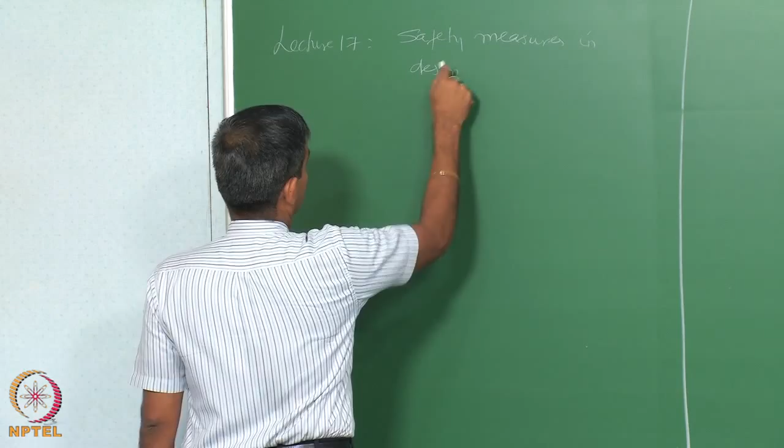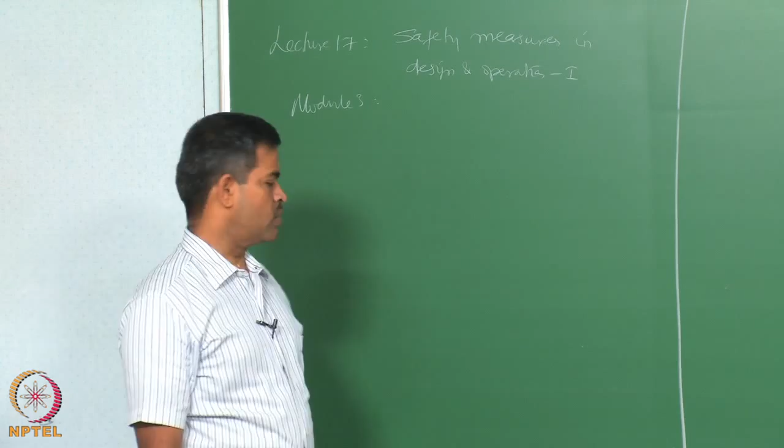This is one lecture covering module 3, where we are focusing on accident modeling, risk assessment and management. We already said that safety and risk are very important items in offshore engineering. In fact, in oil and gas production industries, risk associated with this process is very high. Therefore, though we have admissible levels of risk involved by international agencies, risk assessment and subsequently managing the risk becomes very vital, so that the economic perspective of risk is handled very carefully.

So obviously, if you want to do a very good risk management, your hazard identification, hazard analysis and management should be extremely good. People may think that if you follow safety procedures properly, the risk can be reduced. Please understand, risk is actually an outcome of undesirable events which are unexpected.

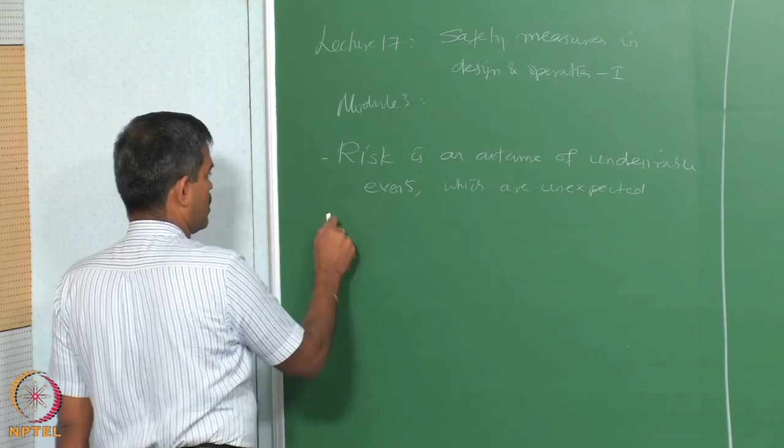They come purely accidental. Therefore, risk analysis will talk about perceiving these events in more or less a possible reality or a probable reality, and check whether, if these events become real, what would be their consequences in the overall structure of oil and gas industries in terms of economy, in terms of loss, etc.

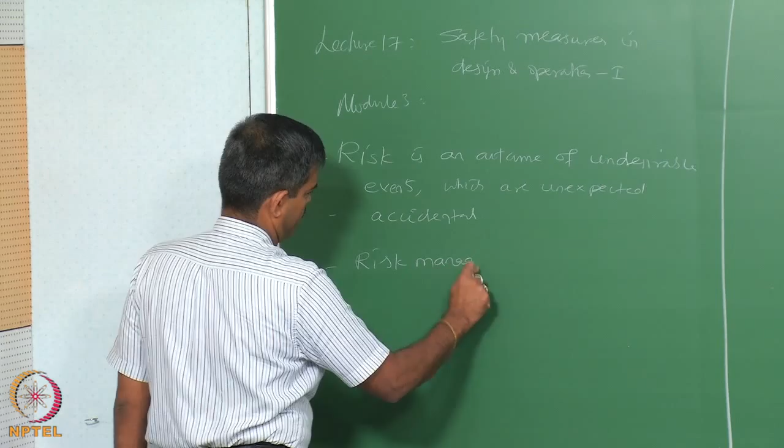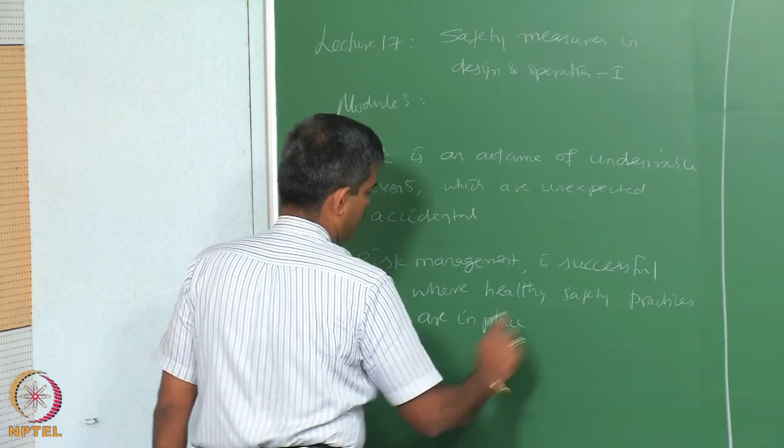When you talk about risk management, I will argue and accept your argument to some extent, saying risk management is successful where healthy safety practices are in place. So what could be those healthy safety practices, safety measures, both at the design level and at the operation level, so that we can do a better risk management, is what we will see in a couple of lectures now.

As we all understand and agree, safety measures can be done both in design stage and operational stage. Safety measures can be practiced both in design and operational stages.

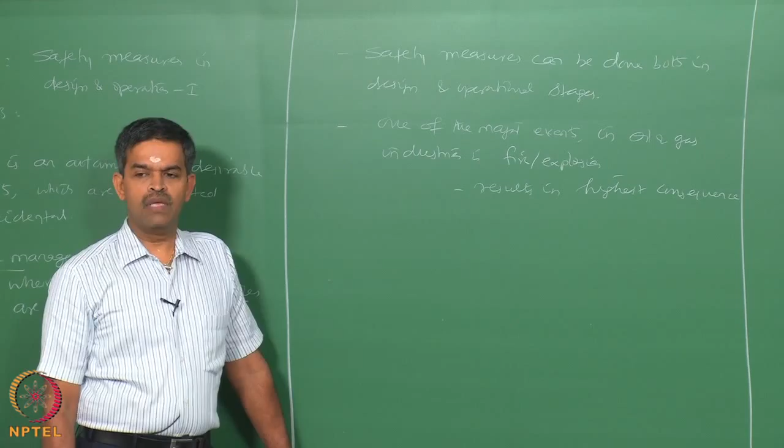One of the major events which is undesirable in oil and gas industry is fire and explosion. Because this results in the highest consequence, prevention of fire and explosion is one of the major focus.

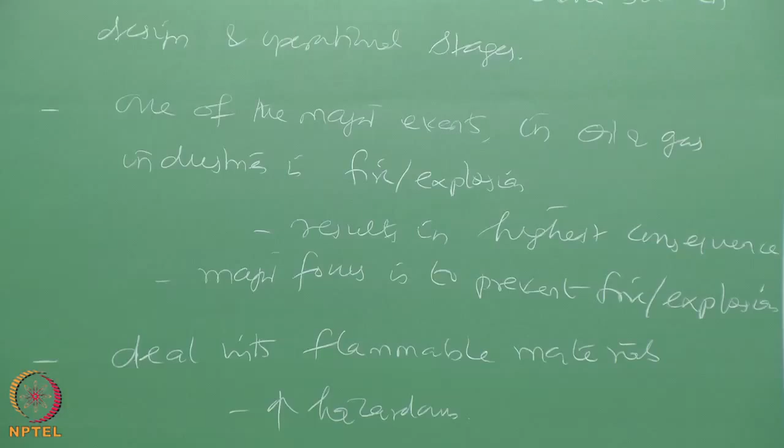We already know in oil and gas industries we deal with flammable chemicals, flammable materials, which are also highly hazardous. The flammable characteristics of the material can be altered in such a manner that it may not result in combustion or explosion, which may otherwise happen when you allow them to exit into the environment. So there are certain terms and certain practices what we will try to understand. Let us try to understand certain terminologies involved in this.

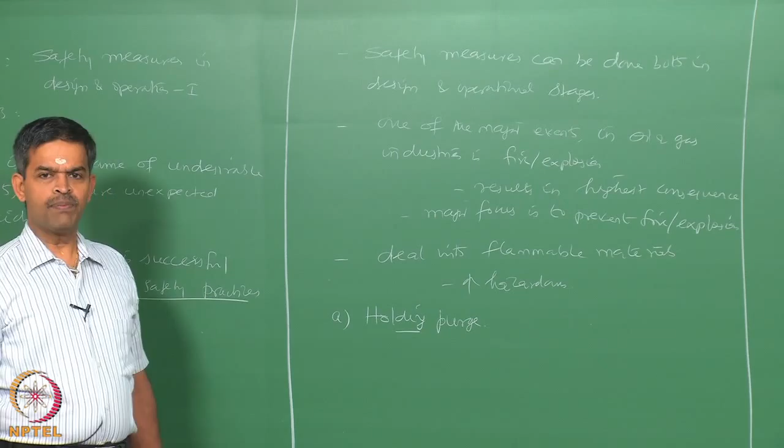Let us say, what do we understand by holding purge? It is nothing but a procedure of maintaining an inert gas or a liquid in a closed system during maintenance or repair.

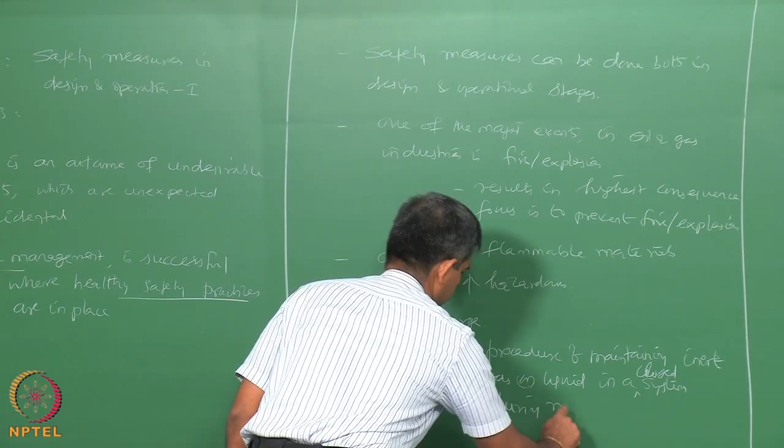So why do you do that? It is actually used to replace the normal combustible content. Something called hot cutting - cutting with the oxyacetylene torch or by other means into any pipeline or a vessel that contains combustible gas - that is what we call hot cutting.

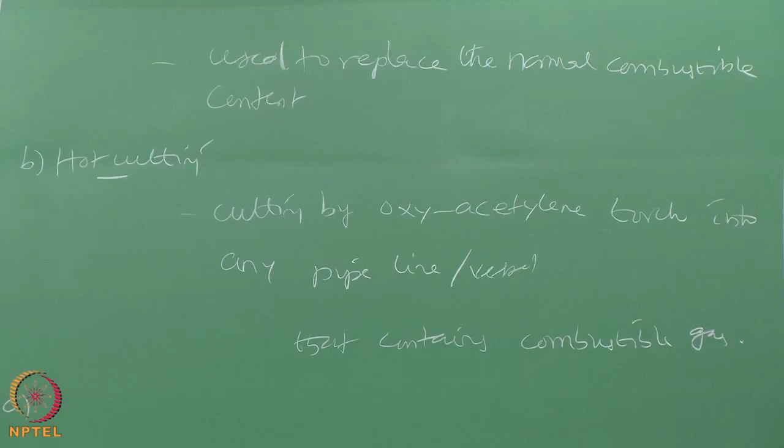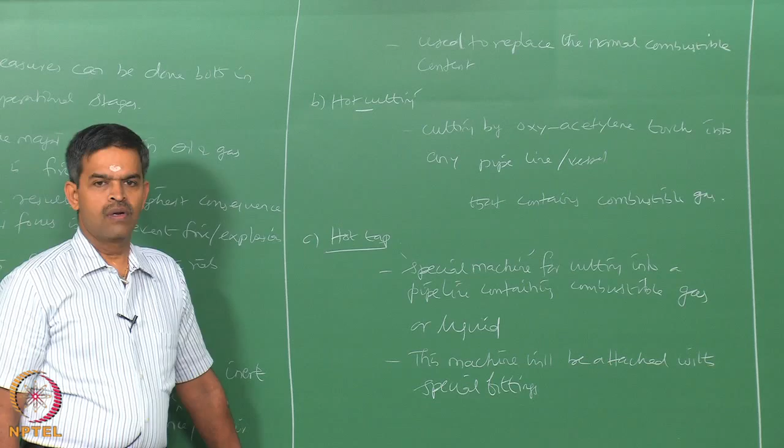Hot tap is actually a procedure of cutting into a pipeline containing a combustible gas or liquid by use of a special machine. This machine will be attached with special fittings which have been previously welded to it on the loaded pipeline. The tapping machine and fittings are constructed such that the required size of the opening may be cut in the loaded pipeline.

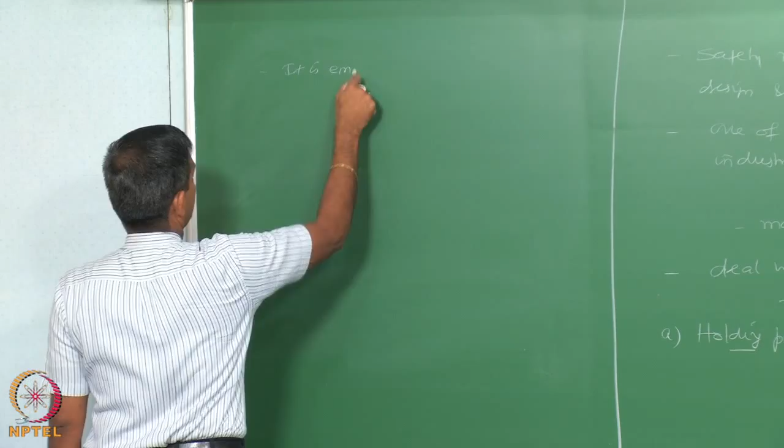So it is actually employed to cut a required size of opening in the loaded pipeline. That is why it is called hot tap. Once the operation is over, the machine can be safely removed without any appreciable loss of combustibles.

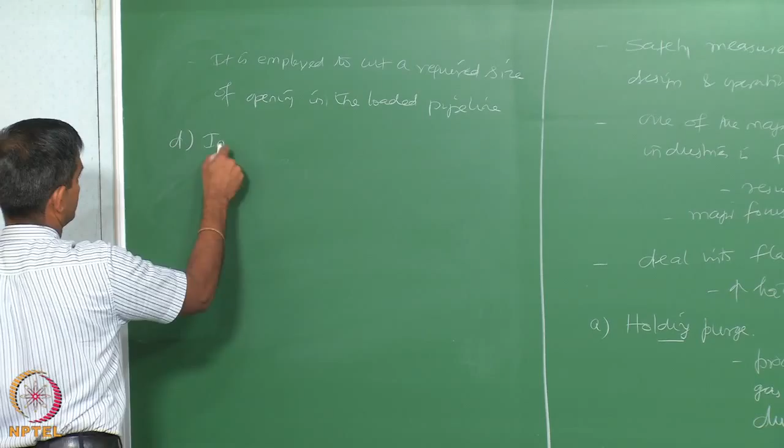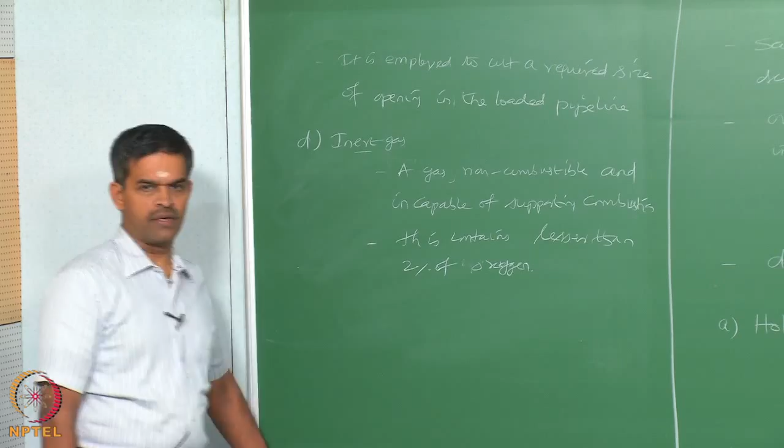Inert gas has special characteristics. It is a gas which is non-combustible and incapable of supporting combustion. How can that happen? Because this contains lesser than 2% of oxygen concentration, and the combustible constituents are lower than 50% of the explosive limit.

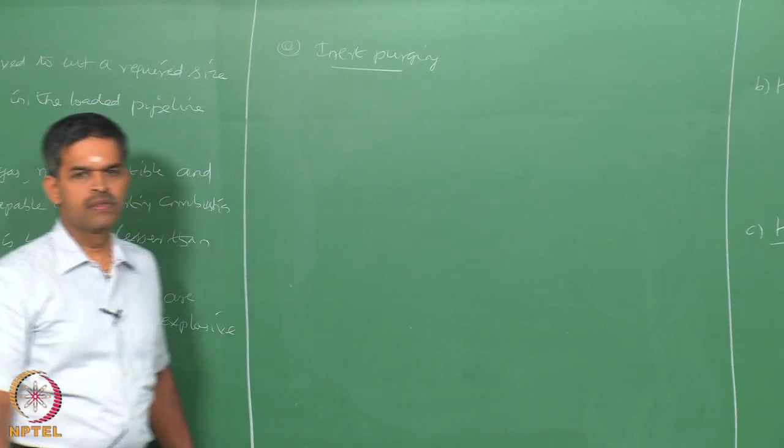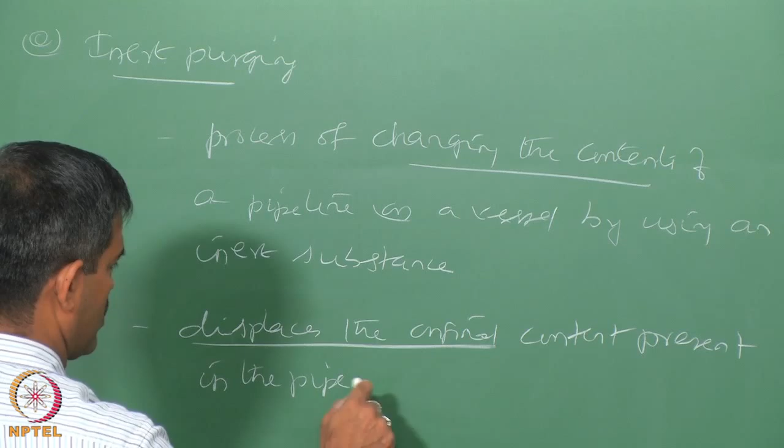Next could be inert purging. Inert purging is the act of changing the contents of a pipeline or a vessel by using an inert substance. It is actually a process of changing the contents of a pipeline or a vessel by using an inert substance. Actually, this displaces the original content present in the pipeline or the vessel. Interestingly, inert purging should not be done with flammable mixtures.

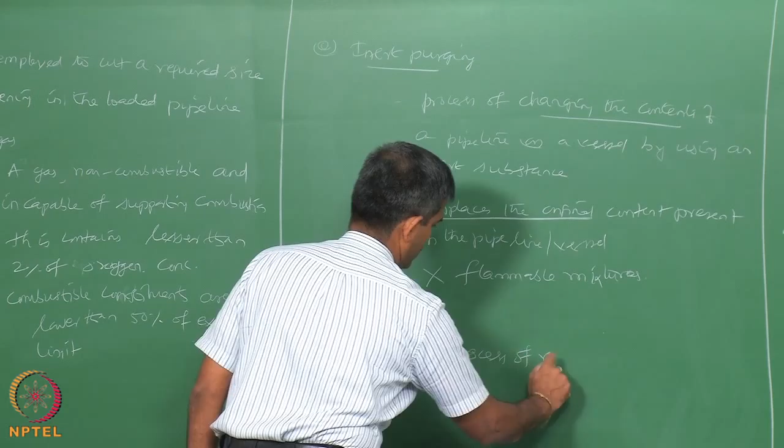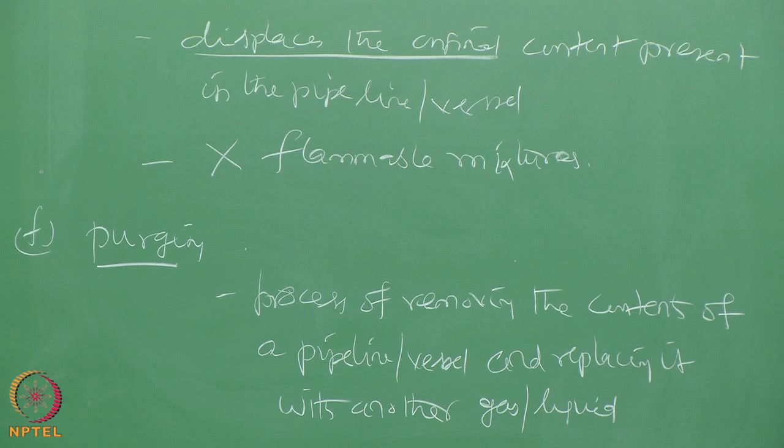Purging is a process of removing the content of a pipe or container and replacing it with another gas or liquid. It is a process of removing the contents of a pipeline or a vessel and replacing it with another gas or liquid. Purge gas - the gas which is used to displace the contents of a container - is called a purge gas.

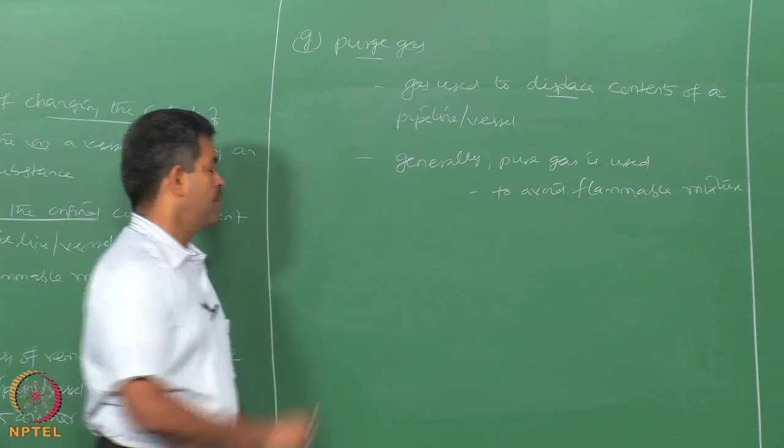Generally, pure gas is used, only to avoid any flammable mixture. Therefore, it is very important to estimate the quantity of purge gas required to displace the contents of the vessel. It enables or ensures a minimum contact with the contents and flammable mixture, so that any possible combustion can be minimized or controlled.

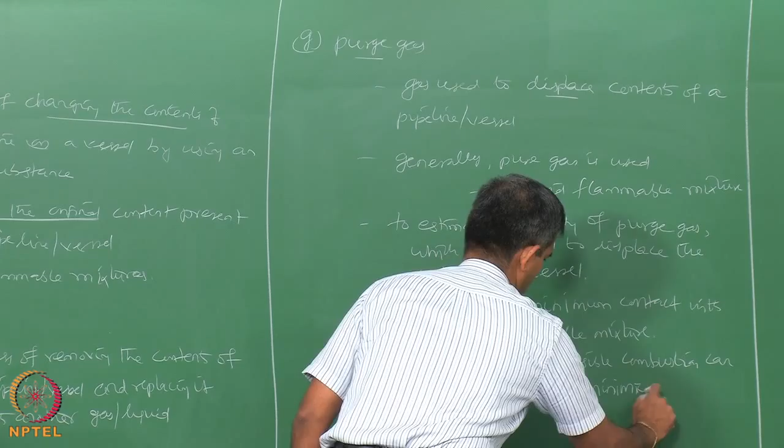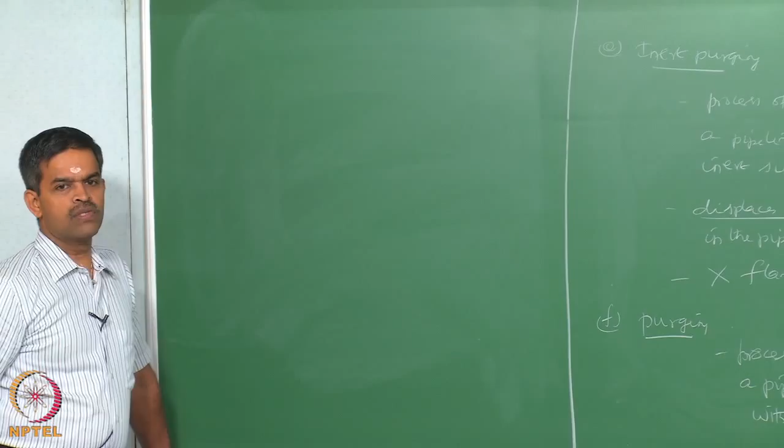We already studied in the earlier lectures about purge into service, purge out of service, and etc. Let us look at them more in detail now for understanding purposes.

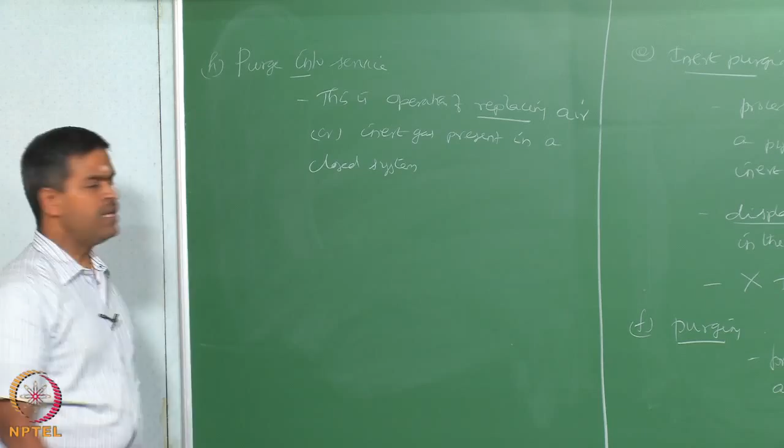Let us say I want to do purge into service. This is an operation of replacing air or inert gas present in a closed system by a combustible gas, vapor or liquid. That is called purge into service.

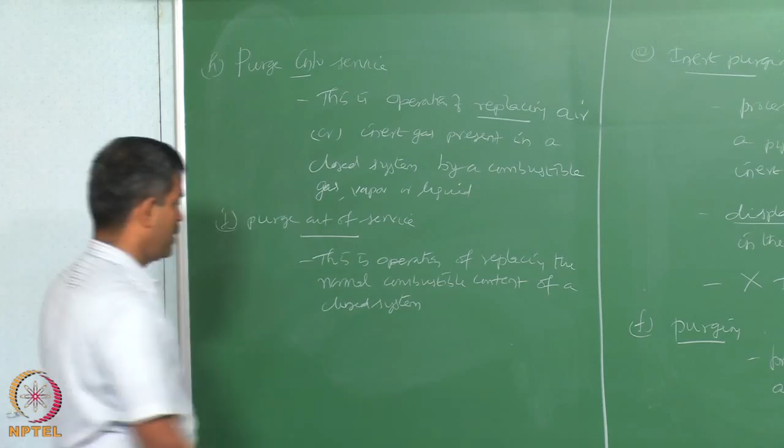Purge out of service is an operation of replacing the normal combustible content present in a closed system by inert gas, liquid or vapor.

Pyrophoric: a substance or a mixture that can ignite spontaneously.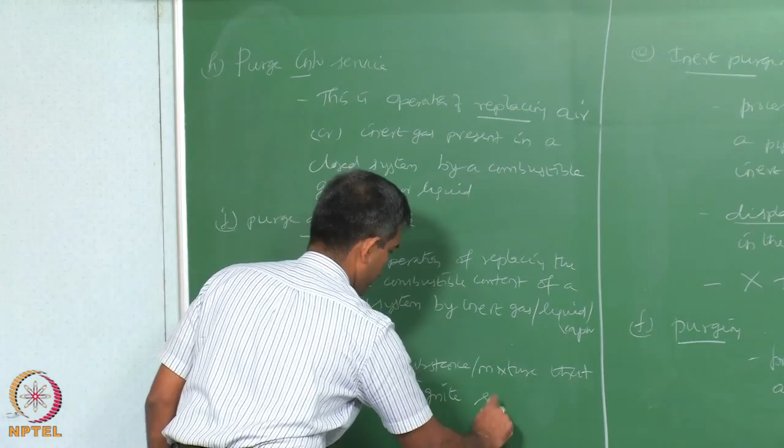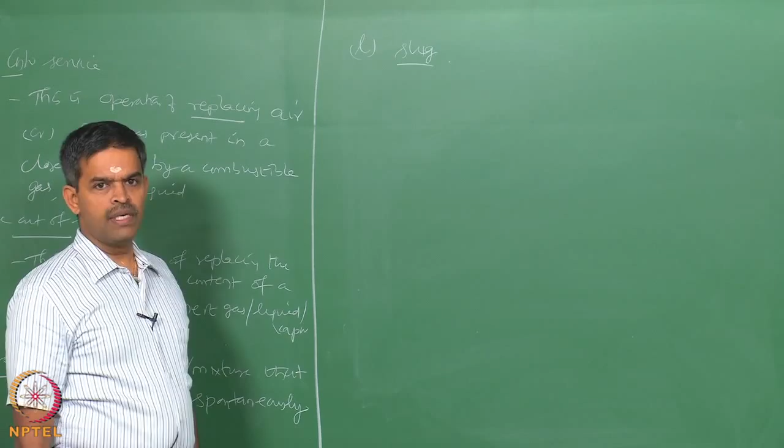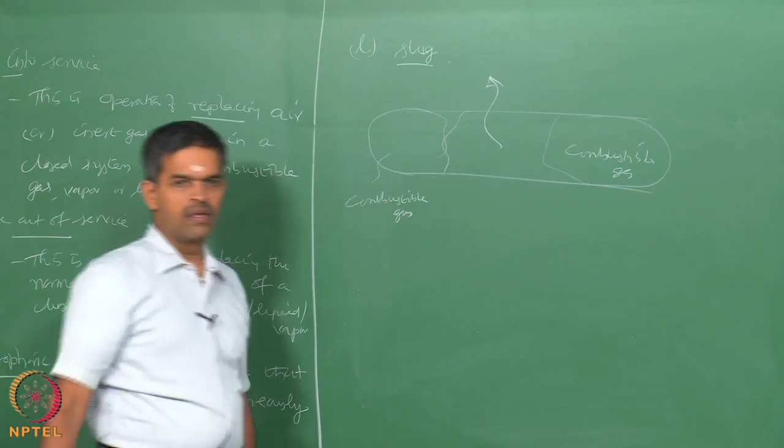Slug: a quantity of inert gas interposed between the combustible gases. Let us say in a pipeline you have a combustible gas, then you have another combustible gas, and in between this becomes a slug. So, slug actually is a quantity of inert gas interposed between the combustible gas during purging.

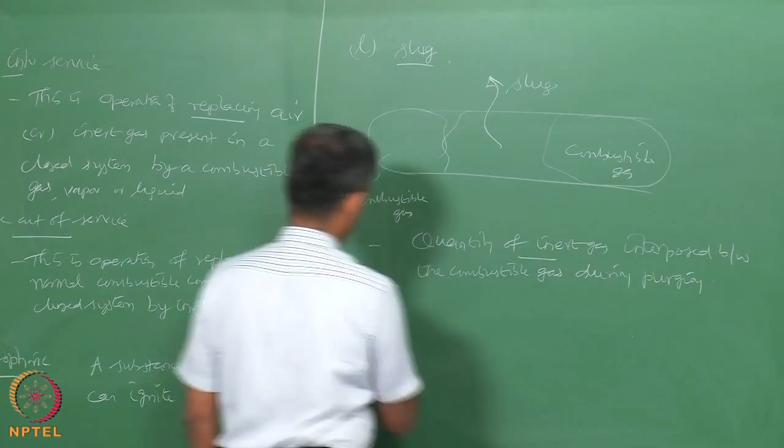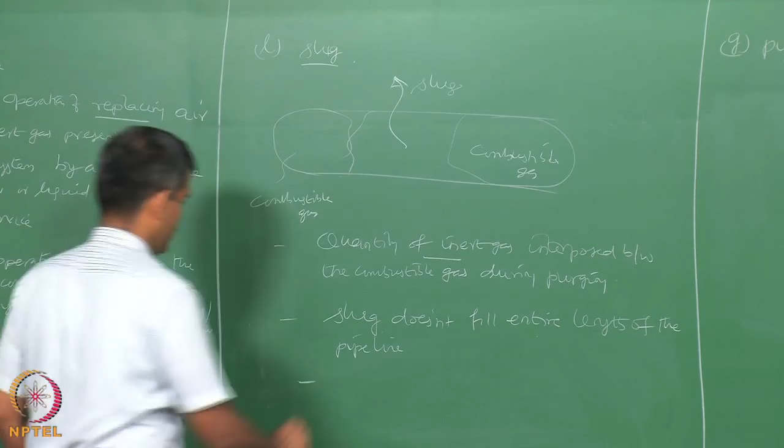Slug does not fill the entire length of the pipeline. It moves through the pipe as a separate mass, which separates or avoids mixing of the gas.

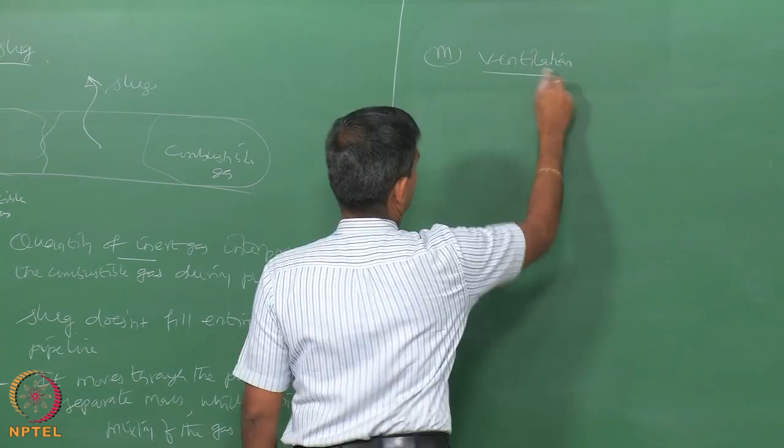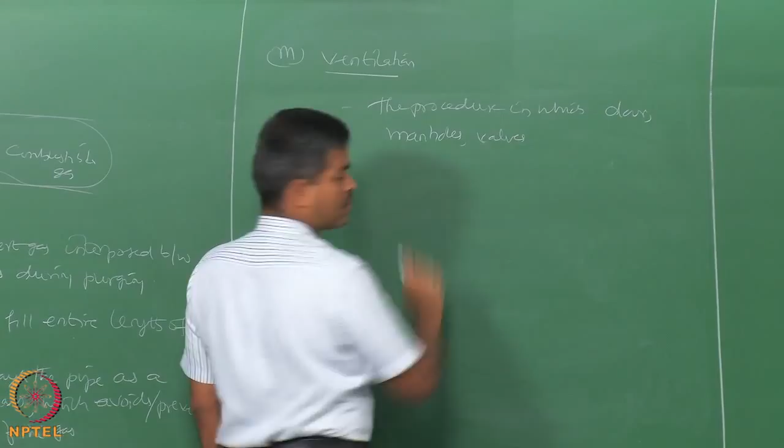Ventilation is the procedure in which doors, manholes, valves are opened to permit the ingress of air by natural circulation. Where there is no proper ventilation, one can also go for forced entry of air into the system for circulation. This is called mechanical ventilation.

The advantage of ventilation is that it helps in replacing the gas contents.

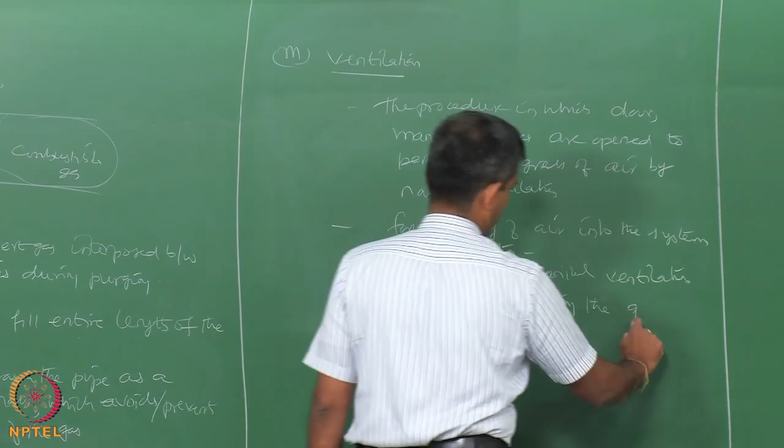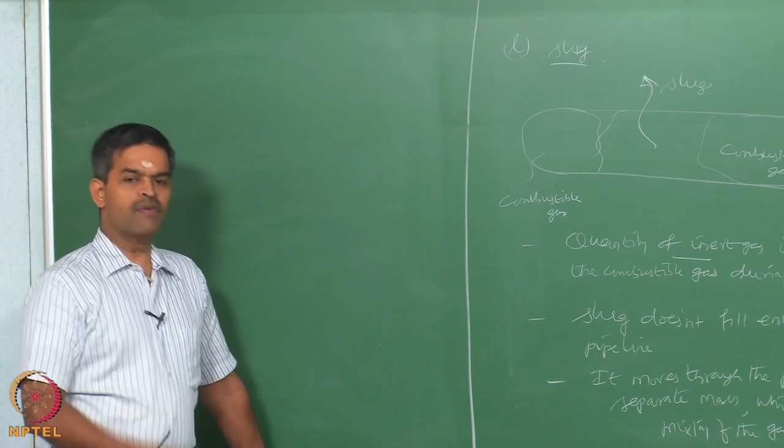So, friends, we have seen that purging is one of the important operations in safety practices, which is very well adopted in process industries and downstream sector, especially in oil and gas industries. So, purging actually helps us to put the vessel back to service or to take out the vessel from service. We have also seen the quantity required, and what kind of pressure purging we should do, in the earlier lectures. Let us quickly see what are the factors that affect purging.

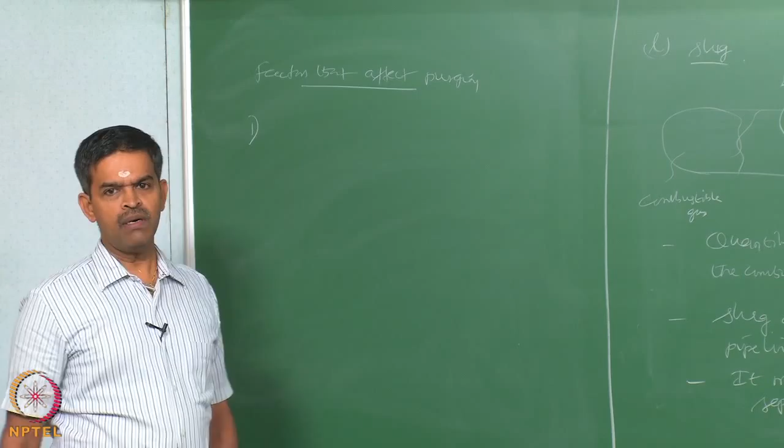The foremost factor is that purging is essentially an operation of replacing one gas by another in an enclosed space or chamber. Two actions take place during purging: one is the displacement, two is the dilution. You can also call this mixing.

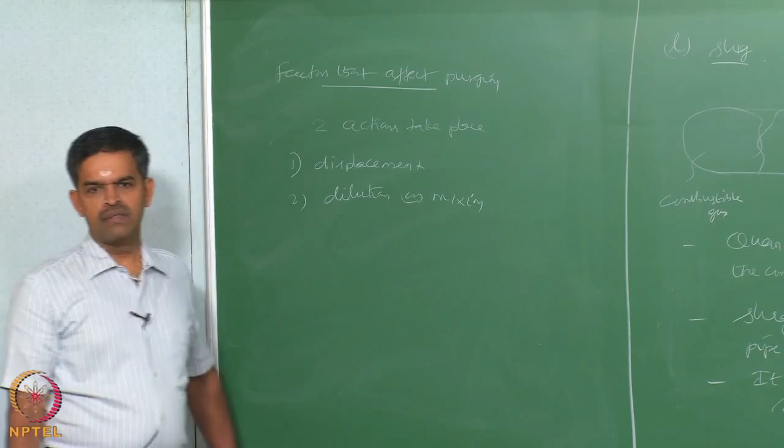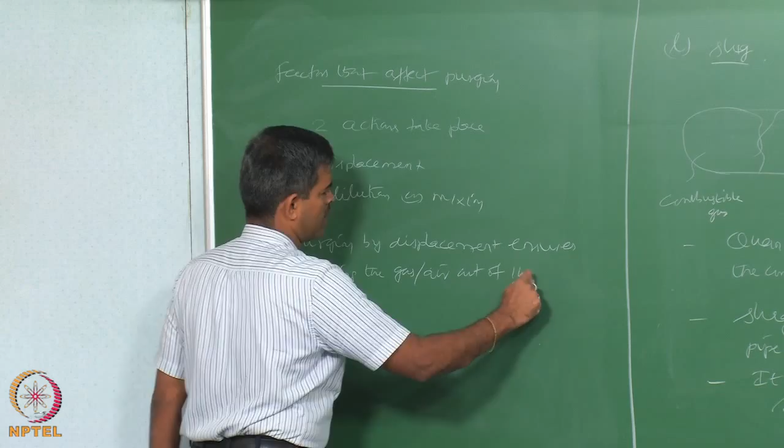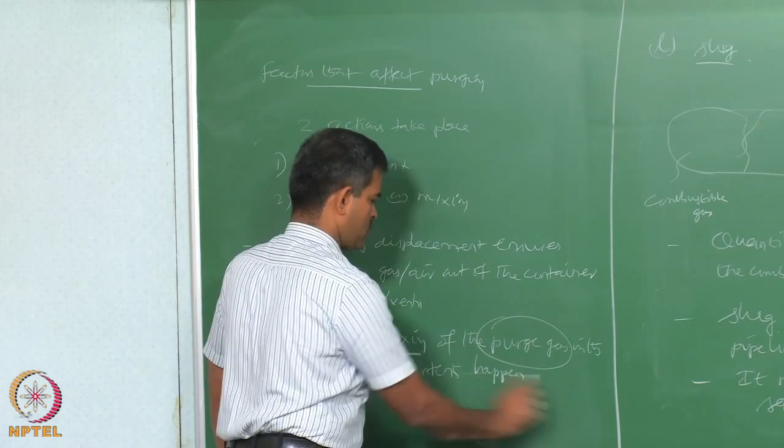In a purge that is effected entirely by displacement, gas or air that is originally present in the container is pushed out of the escape vents. So, when you do purging by displacement, it ensures pushing the gas or air out of the container through exits or vents, so that little or no mixing of the purge gas with the original contents happens. So, no mixing of the purge gas with the original content - when you do it by displacement operation, this should be ensured.

Therefore, friends, the quantity of purge gas required for operation by displacement is approximately equal to the gas which is to be replaced. So, quantity of purge gas required by displacement operation is approximately equal to the quantity of air or gas present in the container, or sometimes even slightly more.

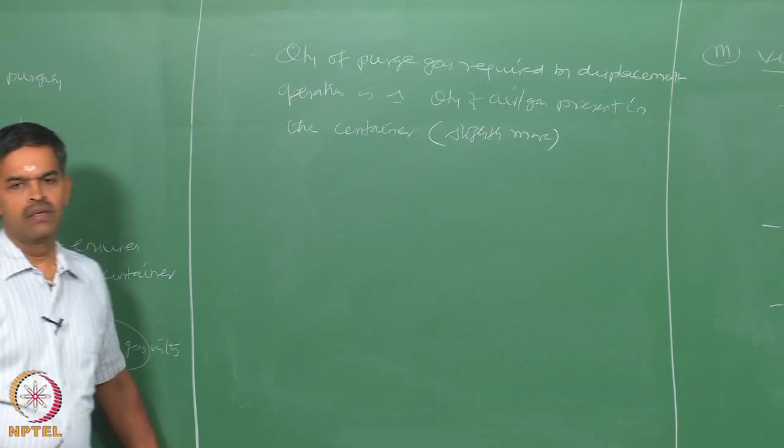Certain conditions are important in this case: size of the chamber or the vessel, shape of the chamber, and the nature of gases - what is used for purging and what should be displaced. So, these factors will govern the mixture of the purge gas with the original contents while getting displaced.

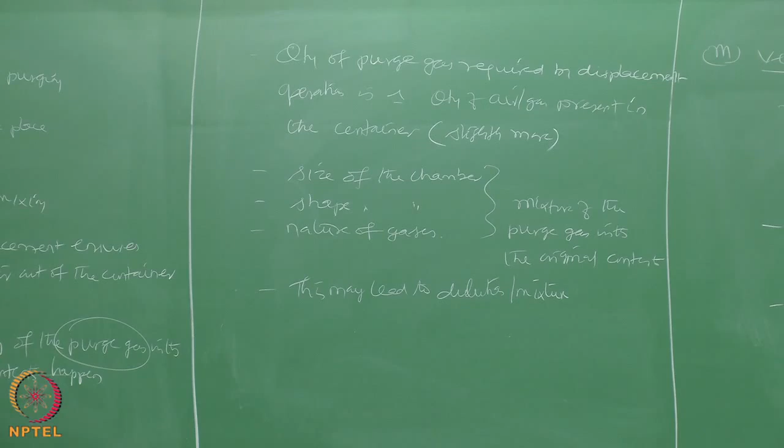This may lead to the next step, which is dilution or mixture. If you are not able to achieve purging 100% by displacement, which will be governed by these factors, then the second issue will come in purging operation, which will result in either dilution or mixture.

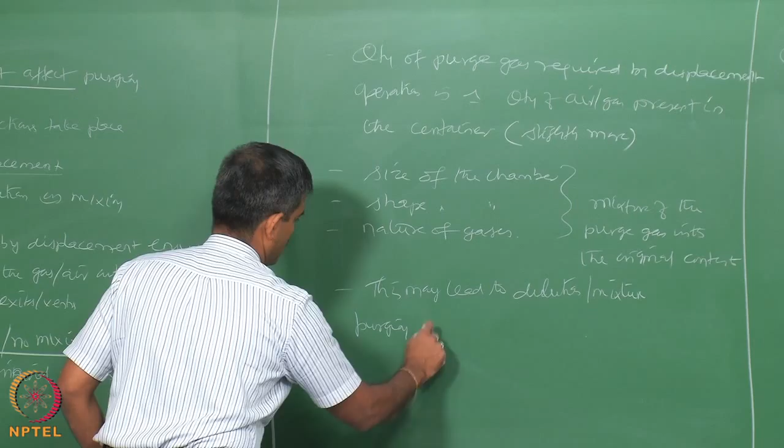So, purging by dilution can be supported in some situations by pressurizing and depressurizing the facility. So, if you really want to do effective purging by dilution or mixture, then one needs to do this operation by pressurizing and depressurizing by many cycles, which we already saw in the previous lectures.

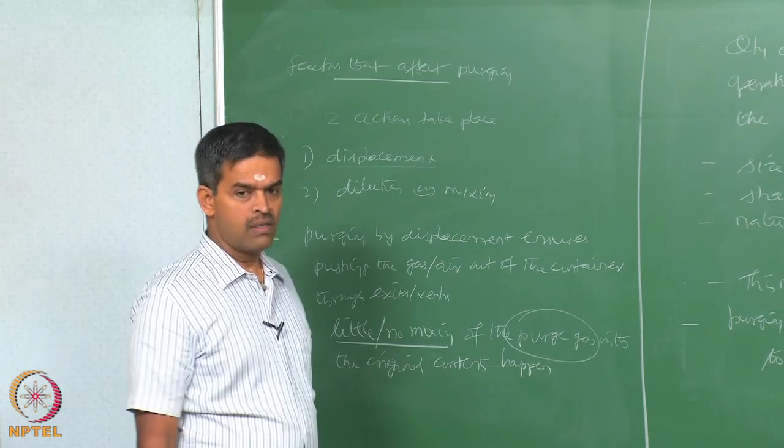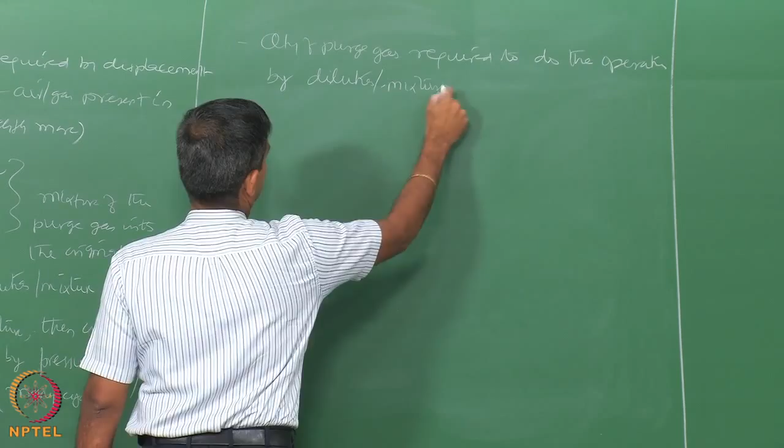So, friends, purging by dilution is considered to be one of the safest methods of operation in safety practices. Of course, one can also do purging by displacement. So, if you want to do purging by dilution, the quantity of purge gas required to do the operation by dilution, which is safe compared to displacement, is approximately equal to 5 times the free space of the chamber.

One can therefore say purging by dilution and mixture can be a delayed and time consuming operation. It is expensive because the quantity of purge gas required to do this operation effectively is 5 times the empty space of the container. However, it is safer compared to that of the displaced content.

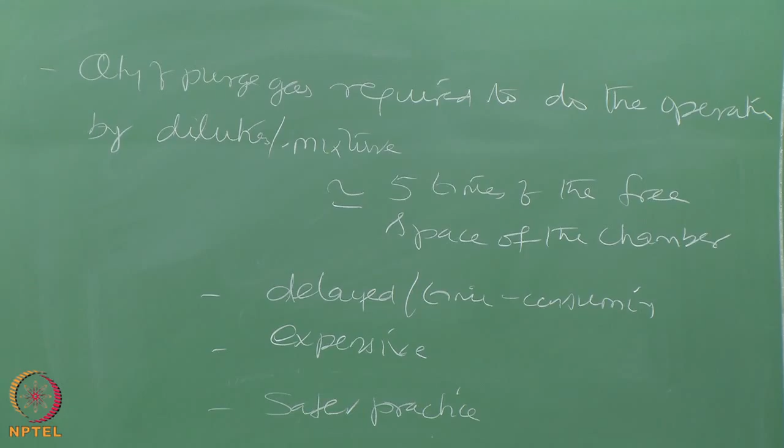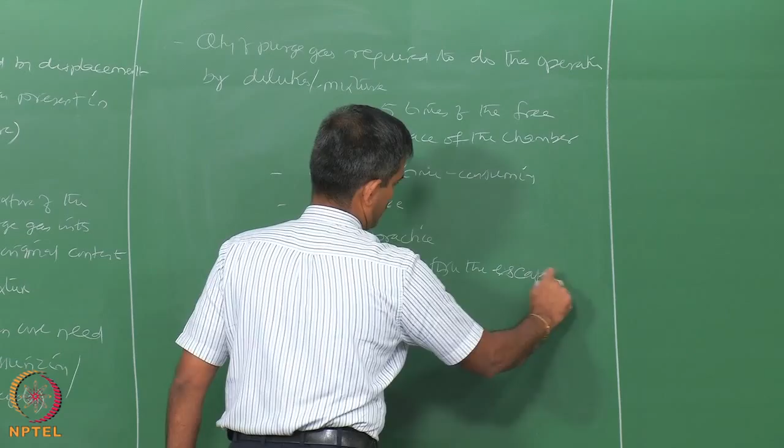Increased demand of purge gas will be seen when increased amount of purge gas is required or it is lost from the escape vents. So if purge gas is lost through the escape vents, then more quantity will be required, which is obvious. So here the quantity required is very large, therefore expensive, but it is very safe.

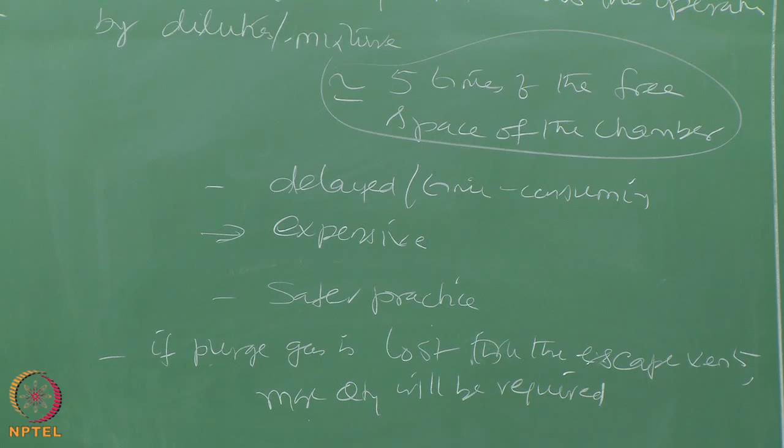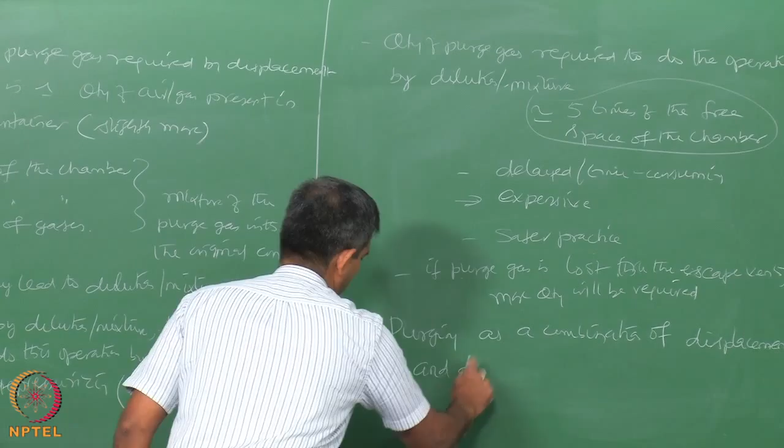Amongst all the purging operations carried out, generally purging is a combination of displacement and dilution action. Generally people prefer purging as a combination of displacement and dilution action.

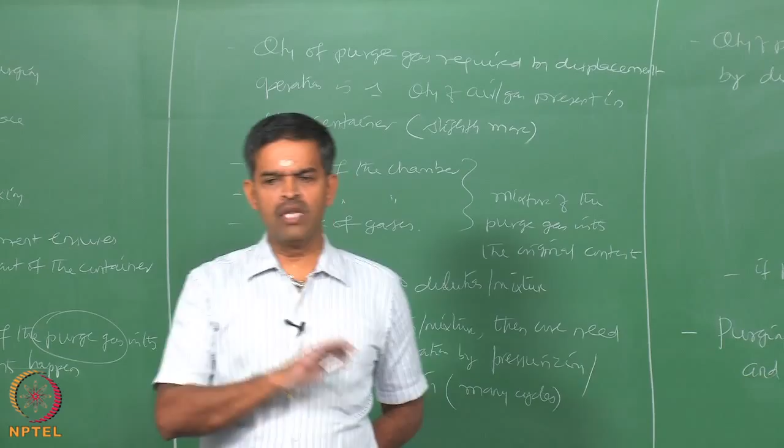In actual practice, it is rather impossible to avoid mixing of the purge gas with the air or the gas present inside the container. In general, one can only ensure lesser mixing or more dilution. So lesser mixing or more dilution of purge gas with the gas present in the container will determine the efficiency of purging. Purging therefore proceeds with mixing or dilution.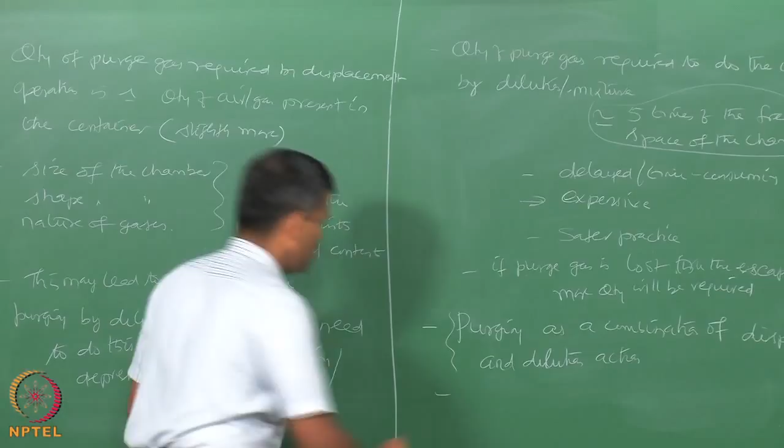Generally it is applied to tankers or holds, which should be accompanied with an inert purge medium to avoid flammable mixtures. That is very important. If you do this operation, then one should go for inert purge medium to avoid flammable mixtures.

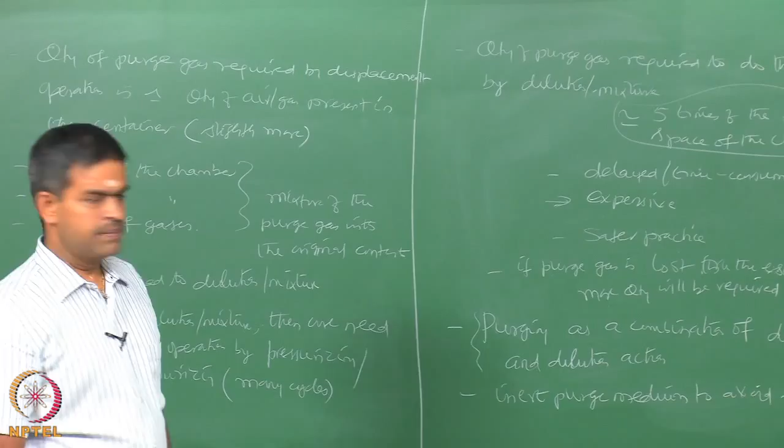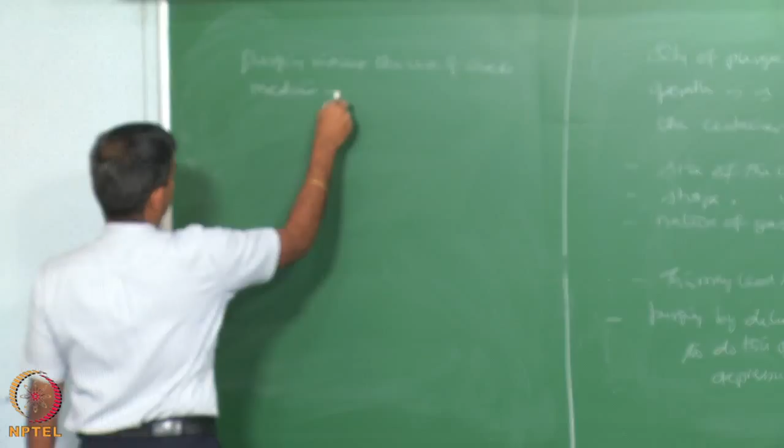Which makes the process bit more expensive. If you ask, can we do purging without inert gas? Then purging without the use of inert medium should be limited only to pipelines. In general, purging without the use of inert medium is limited to pipelines, whereas in the case of closed containers and large vessels, it should definitely be in the presence of inert medium.

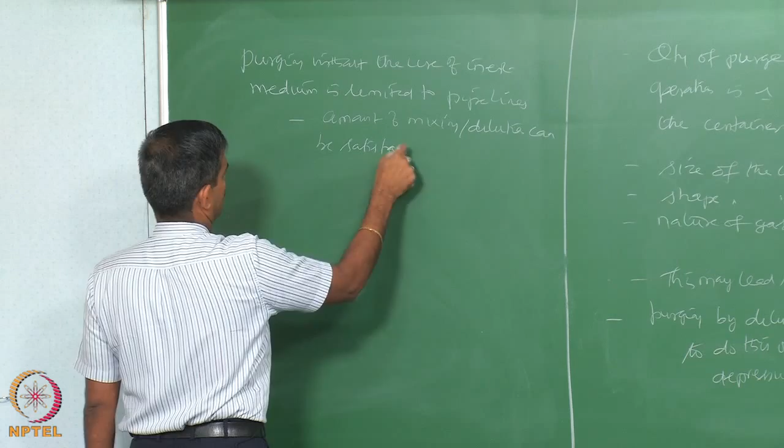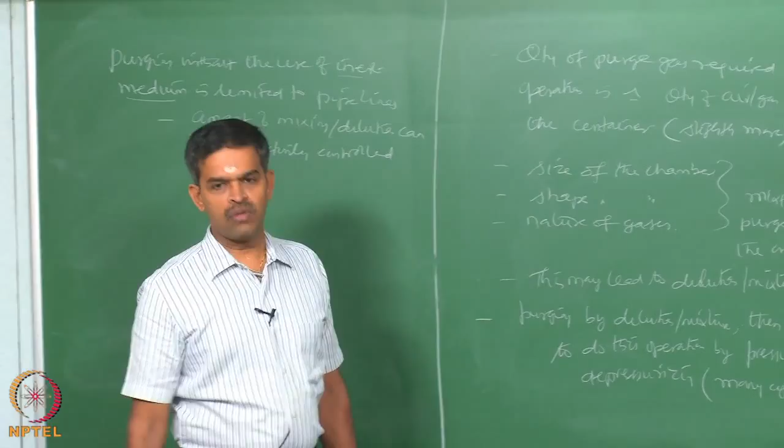It is because the amount of mixing can be controlled satisfactorily by other methods. In this case, amount of mixing and dilution can be satisfactorily controlled, whereas when you attempt to do this without inert medium in large vessels or containers, controlling the dilution process becomes extremely difficult and dangerous. Therefore, one of the good safety practices advocated in the downstream sector and oil and gas industry is that one can do purging by a combined operation of displacement and dilution in the presence of inert medium, so that you can avoid flammable mixtures in the whole process.

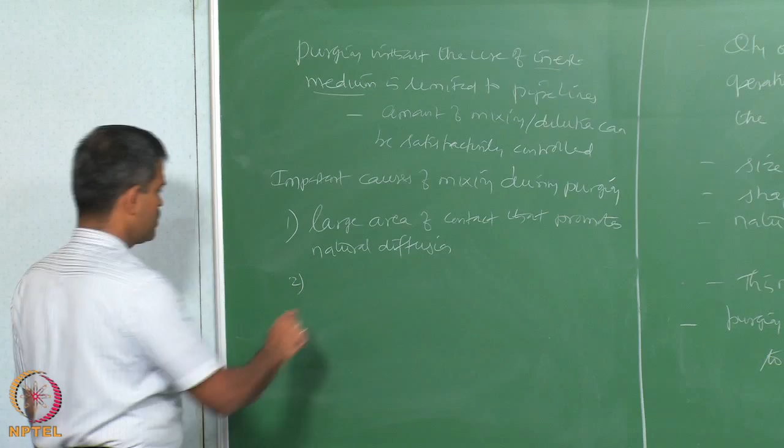Let us see what are the important causes of mixing during purging. Large area of contact that promotes natural diffusion, and long period of contact, that permits natural diffusion also.

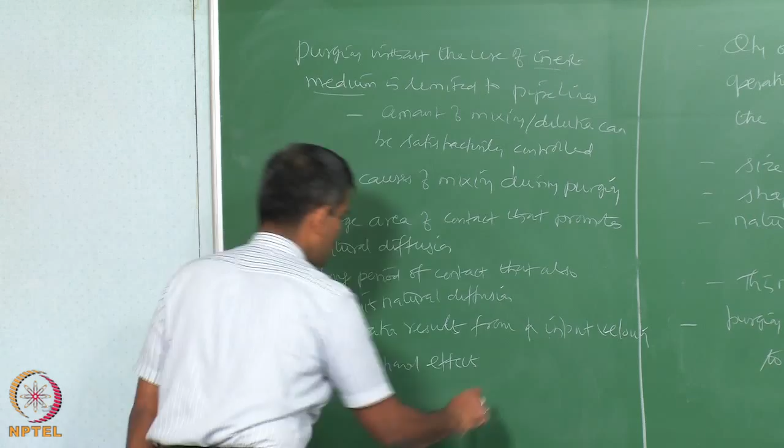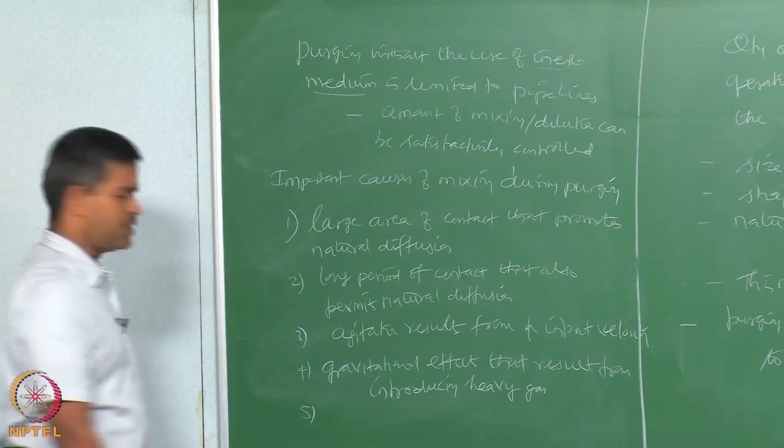Agitation, which can result from high input velocity. Gravitational effects that result from introducing heavy gas for purging, or light gas vice versa. Next could be temperature changes and differentials, which can cause convection currents.

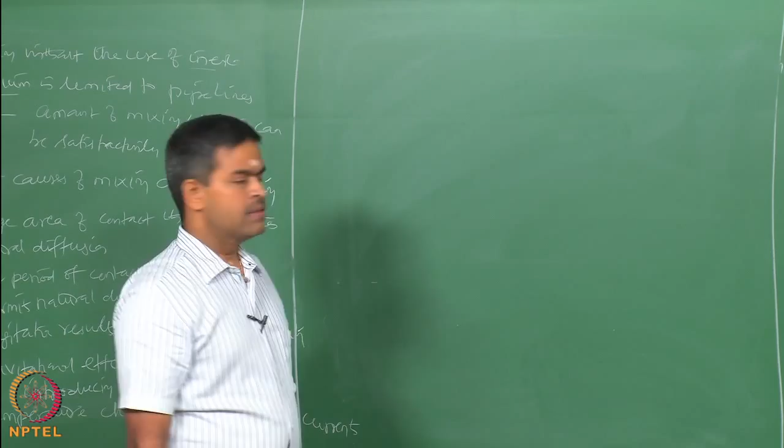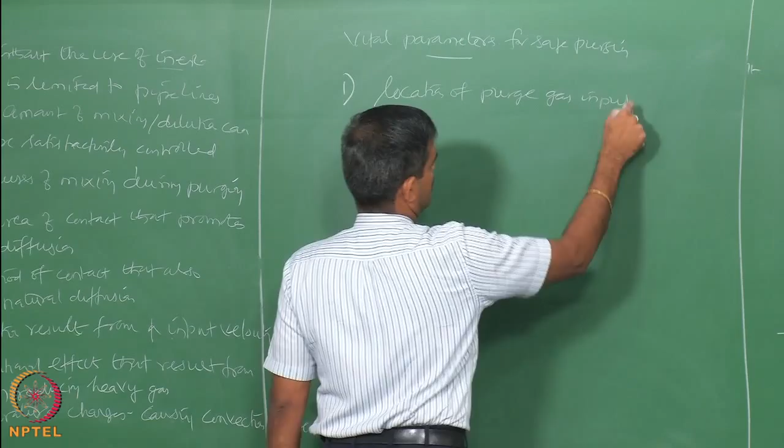As a violation of safety norm, if one fails to understand the important parameters listed below. So vital parameters for safe purging are the location of the purge gas input connection, rate of input of purge gas, and temperature differentials during purging, which are very important to realize to have an effective and safe purging operation.

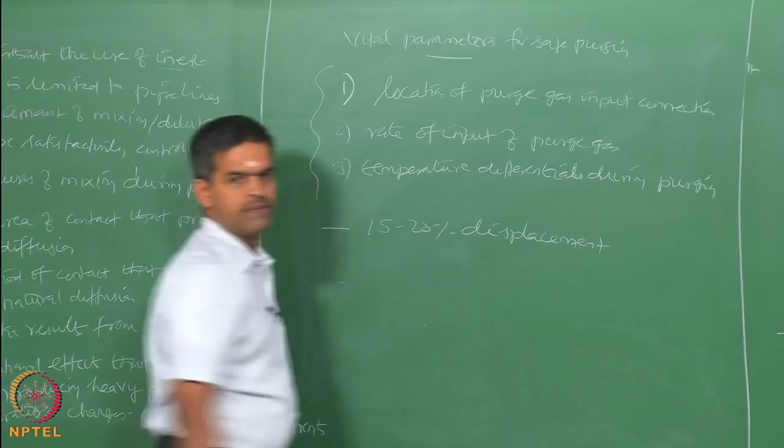So one should generally go for 15 to 20% displacement technique and about 80 to 85% dilution. That is a good practice.

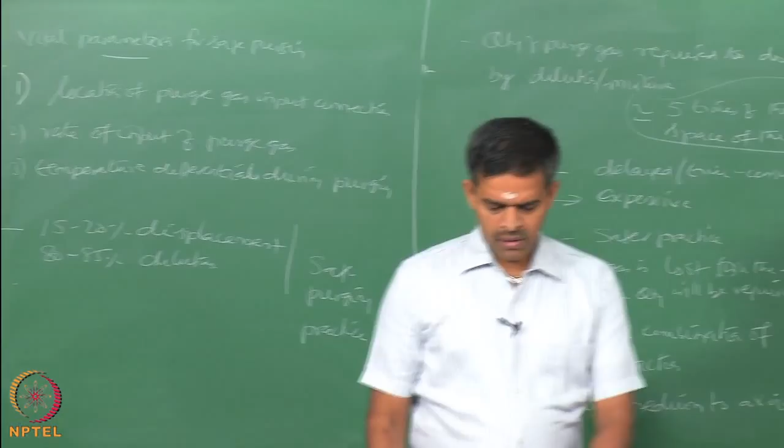There are a few more parameters which will affect the purging operation, and a few more thumb rules which are good safety practices that can be followed in different types of purging operations, which we will discuss in the subsequent lecture. So friends, in this lecture we are trying to list out a few important safety practices useful in the downstream sector, especially in process industries in oil and gas.

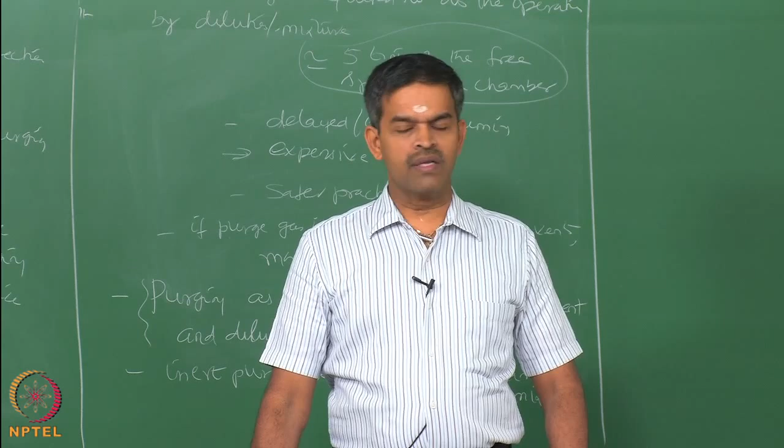Purging is one of the safe and very important operations done in oil and gas industries, essentially in any process industry, to clean up the area or the vessel, or to reduce the flammable characteristics of the liquid or gas present in a container, which is very important as far as the offshore industry or oil and gas sector is concerned. Thank you very much.